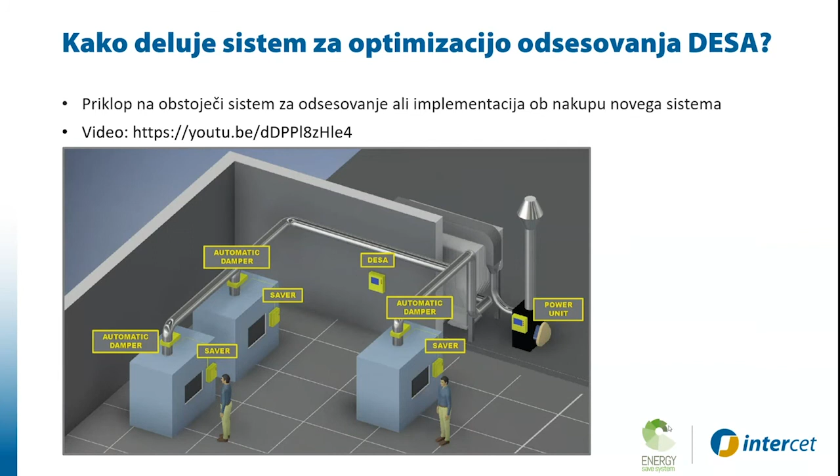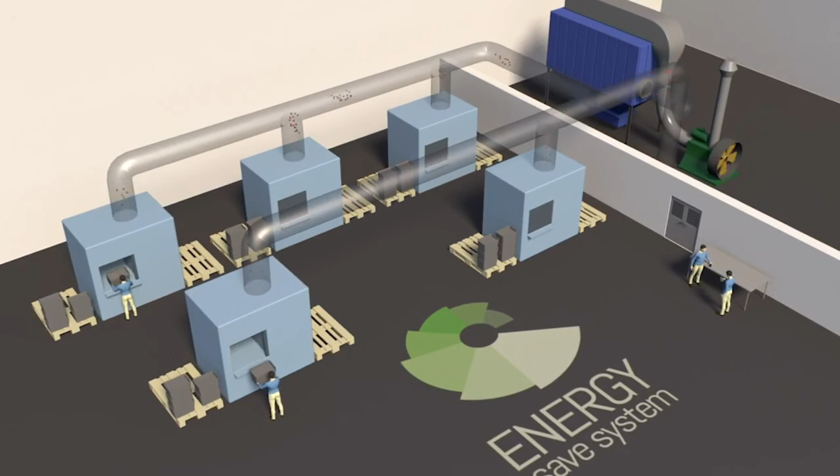DESA will save you an average of 70% of electricity costs and also improve your dust extraction system just by taking control of it. Air volume and electricity consumption are not connected in straight proportion, but with a cube relation. This is why you save so much electricity only by reducing a small amount of air that you are extracting from those situations with no need of extraction.

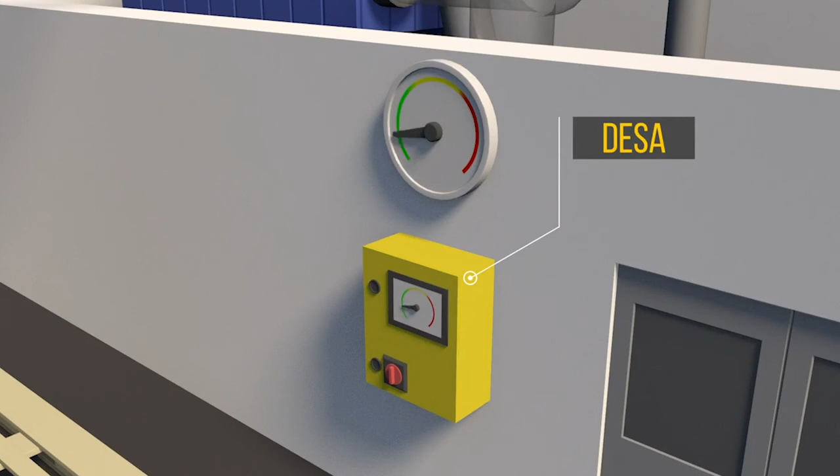The system consists of a saver control box for each machine, an automatic damper for each dropper, a DESA main controller unit with touchscreen, and a power unit to control air volume and pressure in the fan.

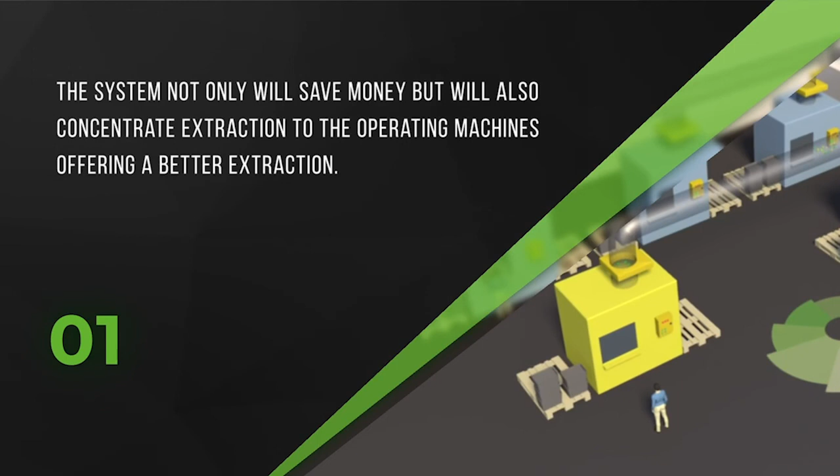Number 1, the system not only will save money, but will also concentrate extraction to the operating machines, offering better extraction. Number 2, not only electricity can be saved, but also heating and refrigerating power, due to the extracted air being reduced just to the needed amount. Number 3, less turbulence in the ductwork means less noise.

Number 4, less stress for filters means changing filters less often. Number 5, filter cleaning happens less frequently. Number 6, general maintenance costs are reduced. Number 7, safety procedures and special machine cleaning processes can be implemented at the customer's request. Number 8, most countries offer government investment support.

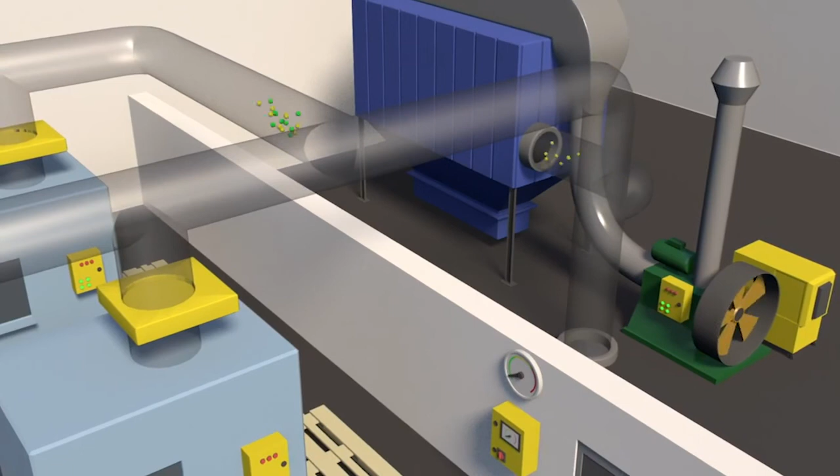Last, not least, the safety. DESA takes care of your ductwork and avoids duct implosion with specific safety procedures, and implements constant ductwork cleaning processes to avoid waste deposit in it. Constant velocity monitoring in the main ductwork guarantees always a correct and safe airflow. It also provides a mechanical safety exclusion system in case of system failure so that you will never stop using your extraction system in all situations.

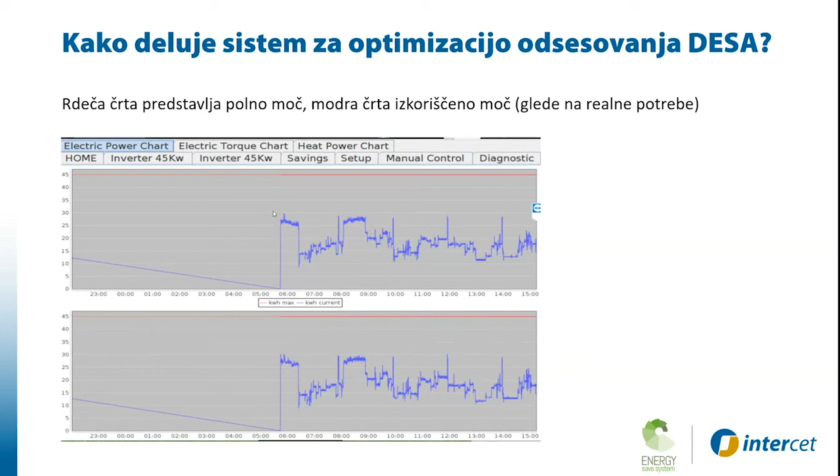Julio, can you connect to one of the systems and share your screen? If you wish so, I'm more than happy to help.

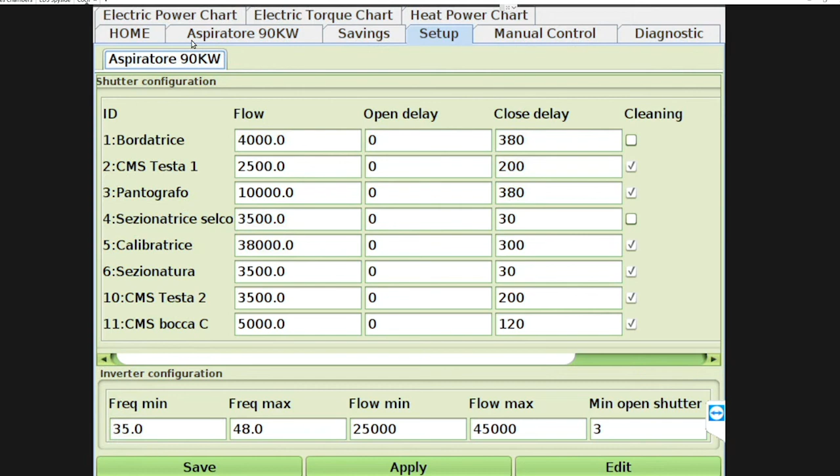The nice thing here is that we can appreciate how even if we are close to the maximum speed of this fan, we are still not using the full power, just a little bit less volume. Now we are talking 3-4% less air volume. How big an impact it has on the power — we're talking here 15-16% less. It all depends on the torque, because the main machine, the CMS, is very, very close to the fan, so it does impact it quite a lot.

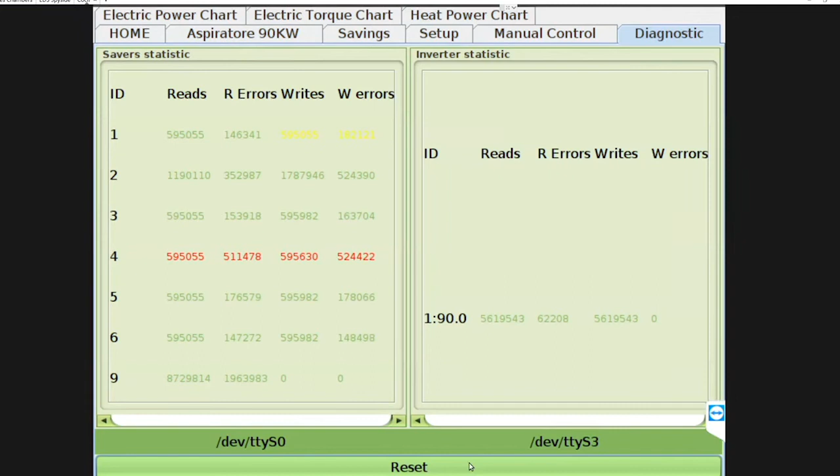You see here we've got a diagnostic system where we can see for each of the items what is the connection performance. This can be reset anytime, and it will count and show you what is the different state of the different communications. It's all wireless.

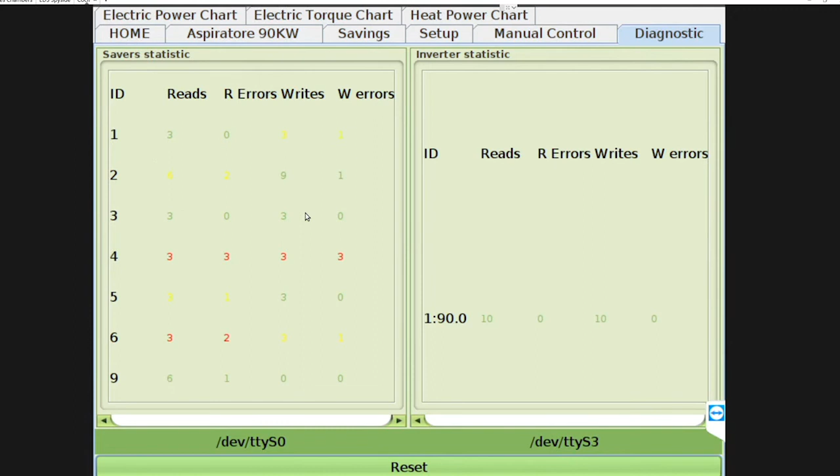And we got the chance to see the power charts here, showing the different use of state and how responsive the system is. They started work this morning at 6, and as soon as they started using different machines, you have different energy use. The usual use without the DESA system would be the red line, while the energy consumption in reality is the blue line.

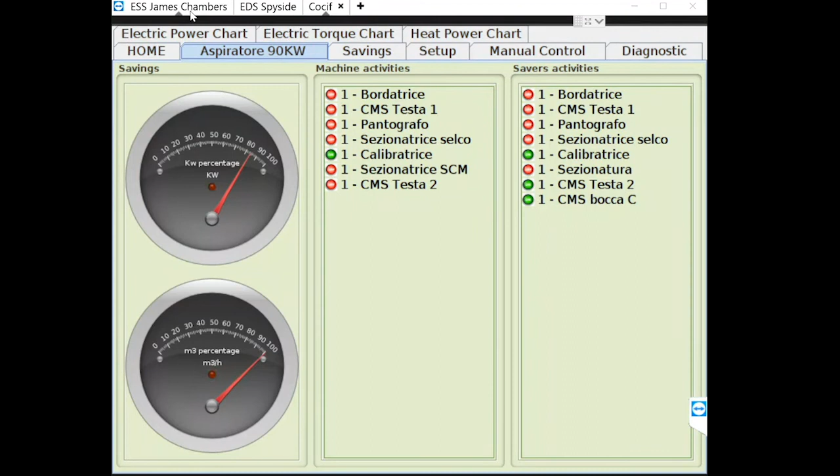Okay, shall we move to a small system? Because one of the questions I have very often is, does it make sense to have a DESA system on a small system? Yes, it does. Because even if you have a small system like now with only 3 machines running, you see the savings are immense. The problem with a small system usually is a higher flexibility in the way the machines are used, so there's more random use of the machines.

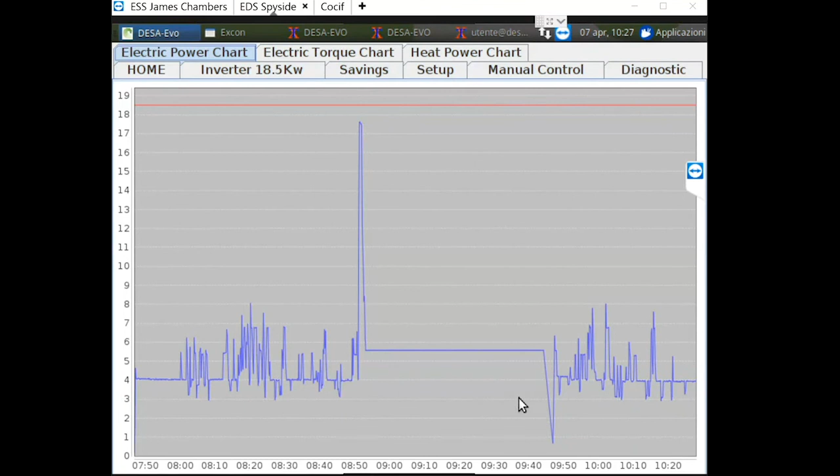Right, let's go to a normal situation, an average system with Weinig machines. I reset this yesterday after Easter, so you can see the savings of 1 day of work on a 75 kilowatt fan in England, where the energy cost is about 15 pence per kilowatt hour.

So in this case, this is the power chart from this morning. You see how differential the use of the machine and the fan power is. And this is the list of machines - they got almost everything from Weinig here. It's easy to save like 60% of energy, even if only one of the molder and the resaw is running, you're still saving 60% at the moment.

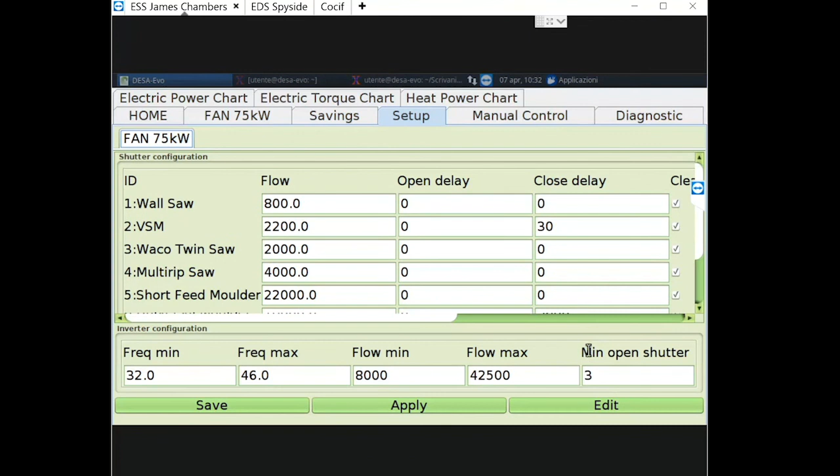Because it's an old system, we need to be careful with duct implosion. I know you explained that already. And therefore we'll have a minimum of 3 open machines. So this explains why there are only 2 machines running and there are 1, 2, 3, 4 open. Because only once we have 3 machines can we stop the emergency dampers, those that guarantee the airflow to avoid the implosion. So this system is actually now extracting from a spindle molder and a multi-rip, which are not demanding extraction. This is to maintain the airflow, so no deposit of material and no implosion risk.

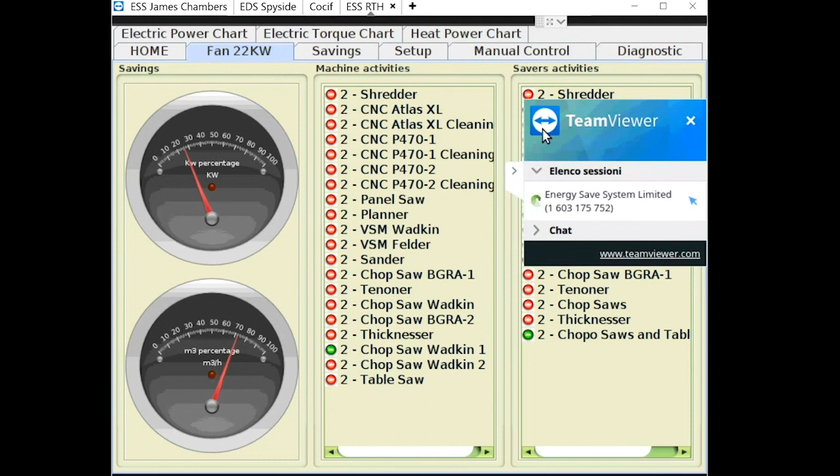Yeah, that's a good point, Giulio.

Now, let me go to a very interesting last case, but obviously we could go on forever. This is an interesting case because this is a staircase builder, a company that has a lot of machines and really changes every day the way it works. A similar type of industry could be shop fitting, for instance. So this guy had a 22 kilowatt fan, and the system was basically extracting from all the machines, and he was spending all the money. As you can see, he's using a machine now, maybe a minute or two. Earlier he used the table saw for a minute or two, then a thicknesser for a minute or two. Or maybe this afternoon he's running 3 CNC routers. It's very changeable, and this is where these systems can really do a lot.

You see, now we're giving 70% of the air with only 25% of the energy. The frequency is 39, so it's almost 80% of the airflow with only 26% of power. These are live readings from the inverters. See how a system with a lot of machines and different use can save energy. Previously, before installing a DESA, it was running a 22 kilowatt fan. And this happens all the time.

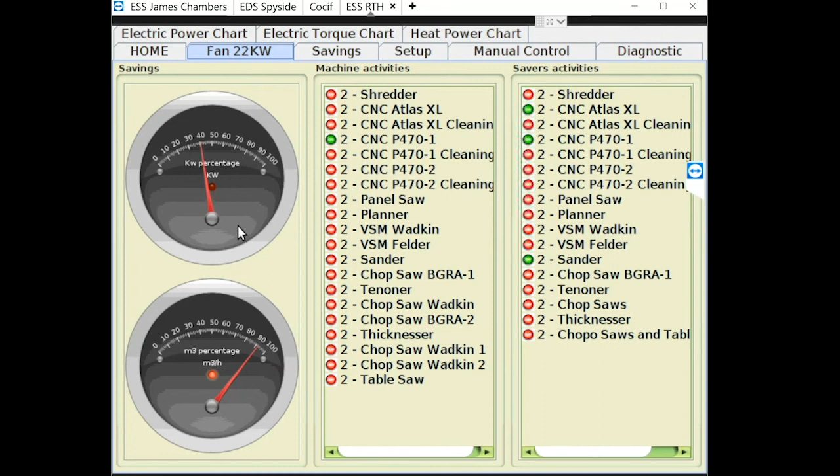This allowed him not to buy a new system. So he added a big machine, like say he needs a new molder. Technically, he'd be going out to spend 50,000 pounds on a new dust extraction, but with the DESA he can just use what he has in the right way. So the dust extraction has much longer life, works much better, needs much less maintenance, and basically it allows you to focus your spending on the machines and not on the dust extraction.

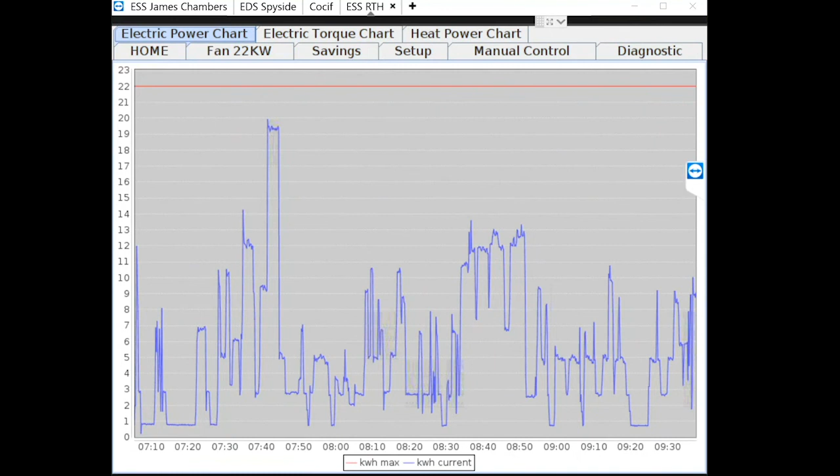Not at the moment, so I propose that we go to the case studies, and maybe we'll have some more questions at the end.

I'm not sure if you see my screen already.

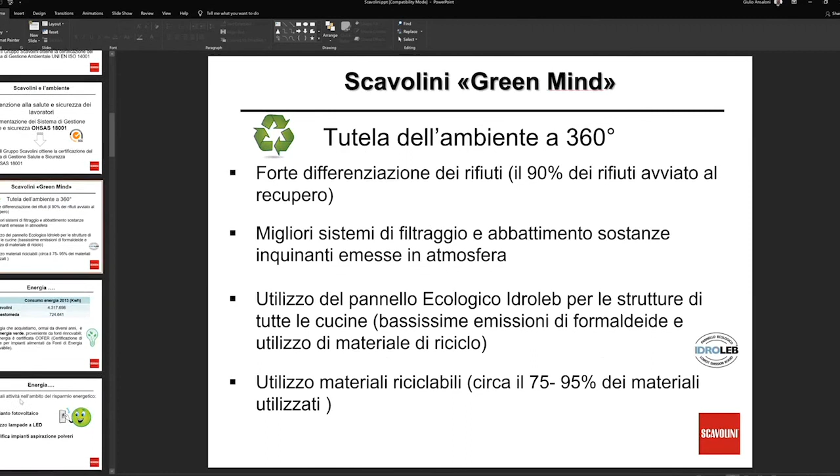Basically, they presented 3 investments: LED, solar power, and DESA. It's a long document that I can share with you, but it explains everything they've done. It's in Italian, but they describe the first intervention for the solar panels, the payback time, and everything. They describe the intervention with the LED systems, where and how they've done it. This is the LED.

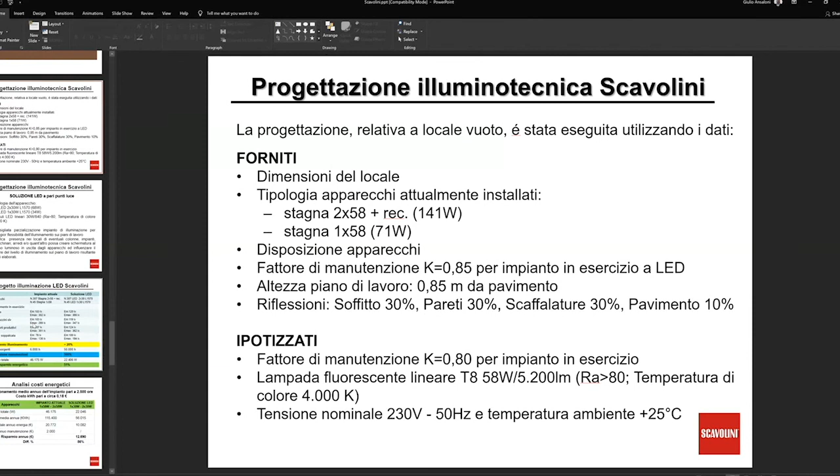It's all being presented at that time, so it's over 7 years ago. At that time, Scavolini was already having a long relationship with us, and they're presenting all their numbers. But when they come to this, it's modification to the dust extraction system, application of the DESA system to the dust extraction.

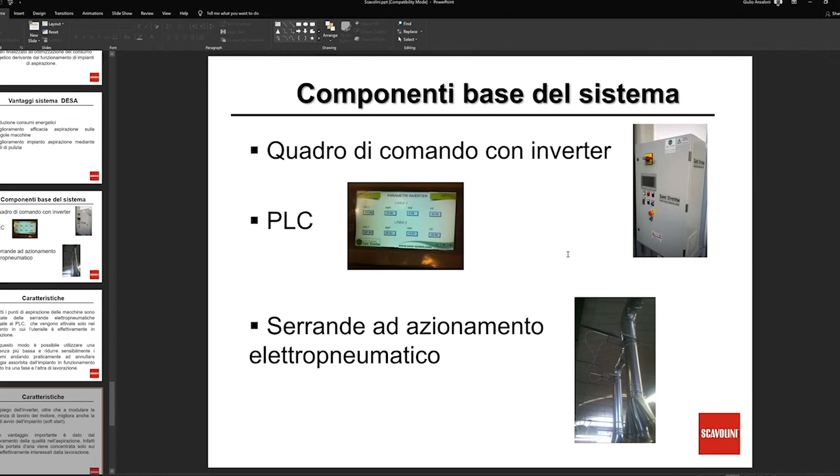And they're saying DESA is a monitoring system that analyzes what the dust extraction is doing and optimizes the energy consumption. At that time, obviously, we were less developed than today, so it looks much more basic because it's a long time ago. But they came out with their records of saving, that's what they recorded in their own measurement, and presented to the other industries what they achieved.

So this is a public paper that you can find on the internet. That's a good example. Thank you. So these guys now have it absolutely everywhere. After the first pilot, they say here we had a pilot system on a 30 kilowatt fan, and straight ahead we signed a contract for the entire factory.

We redesigned the dust extraction everywhere. We took away 6 systems entirely. They had like 25, 30 systems or so. We took 6 away, and we put many together in the same filter, reduced the number of fans, reduced the number of silos. The systems have been downgraded so much.

And now we are consultant for Scavolini. Every time they buy a new system, they talk to us for the new system, and we design it with them so it's highly energy efficient. Sorry, I forgot about having this, but I'm sure you don't mind if I show that. No, sure. I will shortly just translate.

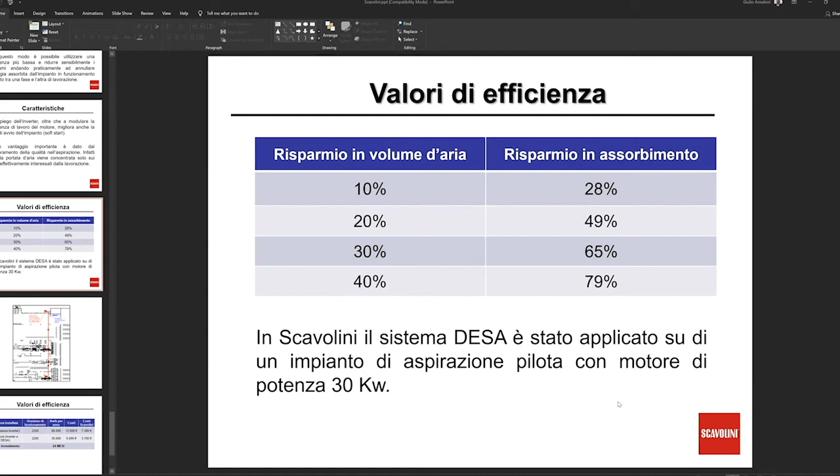I guess I will not translate that. Yeah, I translate for everybody. The gentleman saying that he's producing doors, and I said the first DESA system ever was installed in a company in Italy that is now called Comer Industries, and Comer Industries at that time was called Coop Legno, and they had the very first DESA system installed about 18 years ago or so, and it's still working since then. I can only say, please talk to the president of the company. I can't remember the name of the guy, but I exchange Christmas wishes every time we speak, and I'm absolutely happy to take that as a reference for the doors. It's one of the biggest companies in Italy. It's amazing, and we're very happy to have them as a client.